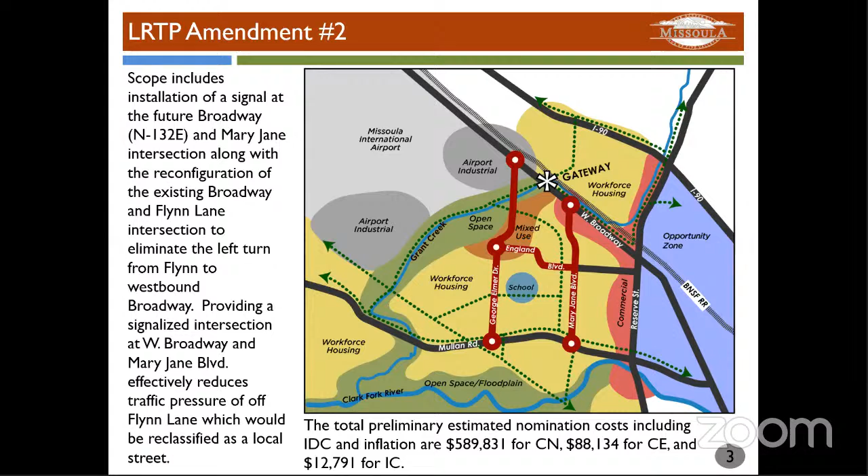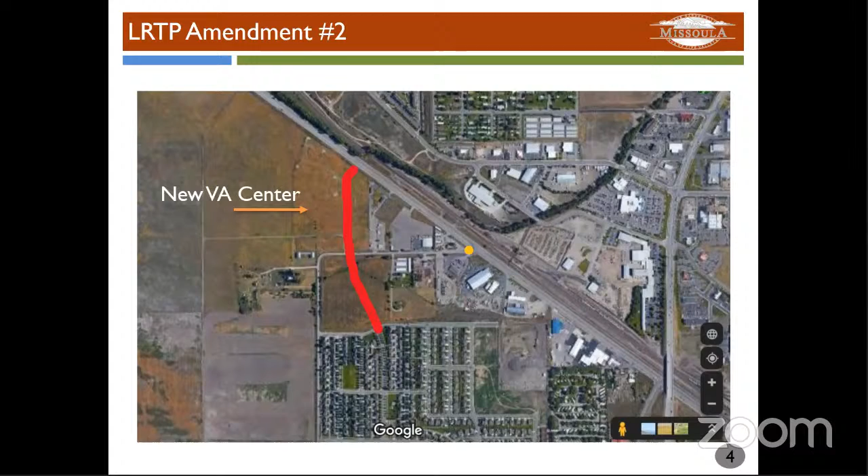So you can see the bottom of the committed projects there. Project 15 would be moved up to committed from recommended or illustrative projects. So staff recommendation is to approve Amendment 2 to the 2020 LRTP as approved, and I'll open it up for discussion.

John, I just have one clarification on the memo. The dollar amounts on this, the total estimated project costs are $10,000 for PE, $677,965 for CN, including CE, and $12,791 for IC. I just want to clarify that—I believe your slide had different numbers. Yeah, you are right. So the numbers I received from the project team are slightly different from what MDT provided. They're relatively close, but that is something we will need to clarify. Okay, thank you. Yep.

Okay, comments, questions from the committee? This is an action item, so I believe we do need a motion to recommend or not recommend approval of this amendment. Ben Weiss.

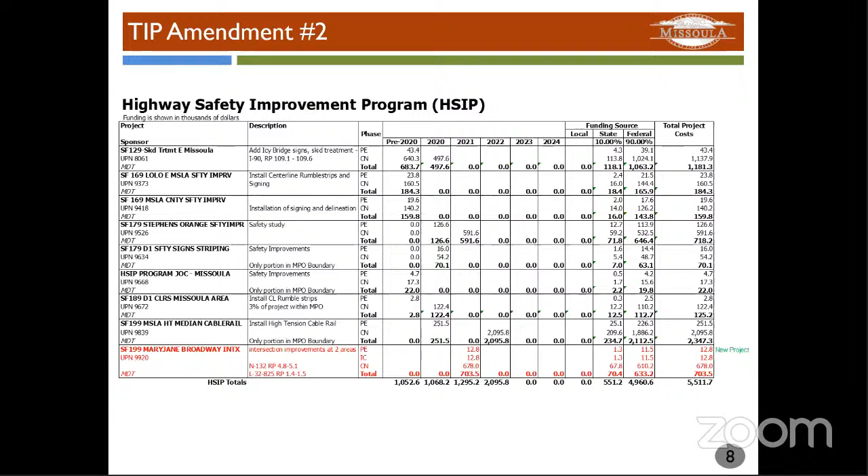The amendment here includes it in the HSIP table, which is part of the transportation improvement program, and this document was included in your memo packet. Here's a screenshot of the project highlighted in red with those costs. You can see the other safety projects included here right now, but we are asking for approval of amendment number 2 to the TIP to include the Broadway and Mary Jane project into the HSIP table.

Okay, so we are looking for a motion to approve amendment number 2. Hi, this is Vicky. I motion to approve amendment number 2. Thanks, Vicky. This is Ellen, I'll second. Thank you, Ellen.

Any comment or discussion on the motion? Any public comment? Seeing none, we'll do a voice vote. All those in favor of the motion to approve amendment number 2, say aye. Aye. Aye. Aye. Aye. Any opposed? Hearing none, the motion passes. Thank you, John. Thank you.

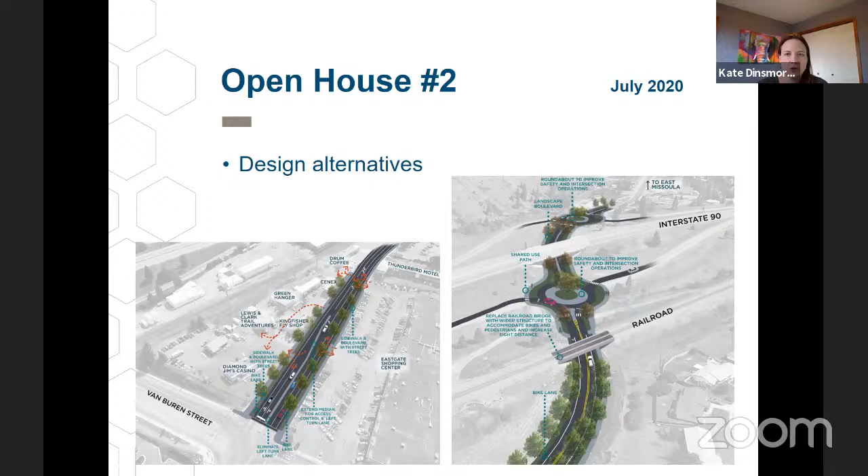I'm going to go through the results of those public comments and then how that led to the preferred alternative. We had over 1,200 Social Pinpoint visits—Social Pinpoint is just the platform we used for gathering comments online. There were 275 unique users, and we had 196 survey responses and comments.

The first question we asked was for a preference of the alternatives. There were 3 different alternatives: complete streets, shared use path, and sidewalks and parking. There was a pretty strong preference for the shared use path option, which I'll give you a quick glimpse of to remind you what that was. Basically, that included a shared use path from Van Buren to Easy Street and a shared use path along the base of Mount Jumbo connecting downtown to East Missoula.

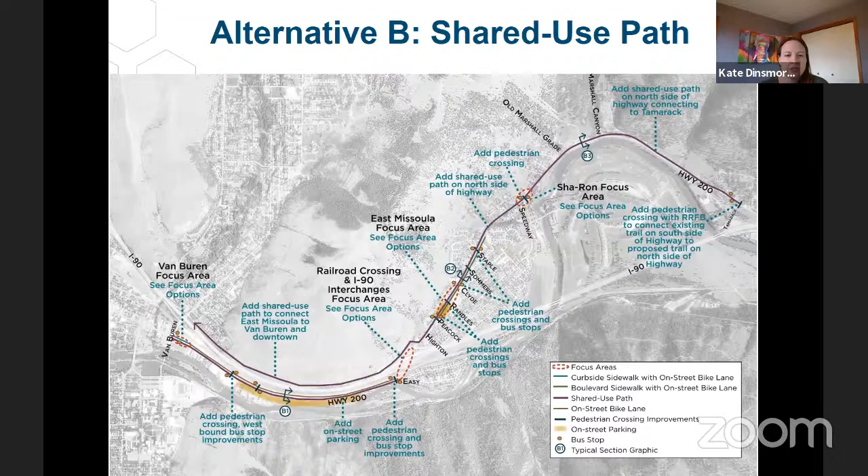The comments we got were that people liked the safety aspect of it, with the path having that separation from vehicles. They liked having a continuous path the entire length of the corridor, including a trail along the base of Mount Jumbo, which people generally liked. They also liked having boulevards with landscaping. There was concern about not having a connection along 200—how this path stops between Easy Street and Highton—really wanting to still have that connectivity. There were also some concerns about maintenance.

The first focus area was along Van Buren, on that west end, trying to get a preference for what people wanted as far as bicycle and pedestrian amenities. There was a strong preference for a shared use path for bikes and also for pedestrians, but some people desired a boulevard sidewalk there.

The next focus area was at the I-90 interchanges and the railroad underpass. There were 3 options here. The first was 2 roundabouts, one at each of the eastbound and westbound I-90 interchanges, plus an improved railroad underpass—completely replacing that with a wider structure. The second option, which I'm showing, is the Mount Jumbo shared use path connection, which didn't include the connection from Easy Street to Highton Street, or changes to the railroad underpass there.

And then the third option was one roundabout, and it would have just been that eastbound I-90 interchange, not the westbound, and also did not include any bike ped improvements.

And so people generally really wanted to widen the underpass for the railroad. I think this one was a little bit of a nuanced survey, because not all the options included the railroad underpass. If we would have added that to the other two options, we would have seen a different response. But I think what we gathered from this is that people really liked the railroad underpass, generally thought there was a need for a roundabout, particularly on the eastbound side, and then liked the Mount Jumbo option because it didn't move bikes through the roundabouts.

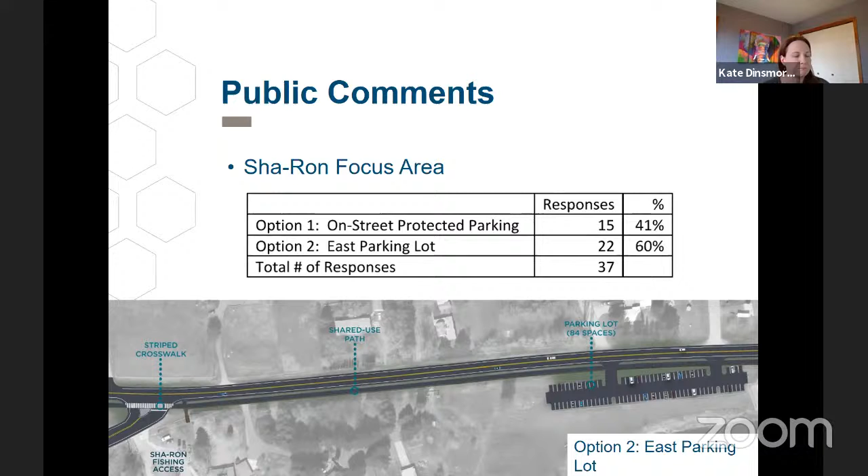All right, so after we got all the public comments, we met with our advisory committee to determine the preferred alternative. We had two meetings where we figured this out, and it began by evaluating and ranking the alternatives based on their ability to achieve the project goals. Those are improving safety, improving operation and addressing access management, expanding multimodal options, enhancing the unique character of each segment, being cost-effective, feasible, and maintainable, and protecting the environment from negative impacts. And then we also took into consideration public support.

So this is the preferred alternative that was developed. It was decided that a mix of the alternatives was needed to respond to the unique character of each segment of the corridor, and no one alternative was the right solution.

The committee agreed right away that bike ped facilities should be included for the entire length of the corridor, with a mix of shared use paths, on-street bike lanes, raised cycle tracks, and sidewalks. One of the first and easiest decisions was to include a shared use path from Staple Street to Tamarack. There's a lot of discussion on the other segments, so I'm going to go into more details of those areas.

Looking at this overall preferred alternative, it includes a shared use path and on-street bike lanes from Van Buren to East Missoula, with a new wider railroad bridge and eastbound I-90 interchange roundabout. Through East Missoula, cycle tracks, sidewalks, and landscape boulevards are proposed. A new parking area is proposed just east of Sha-Ron, along with a shared use path connecting East Missoula to Tamarack.

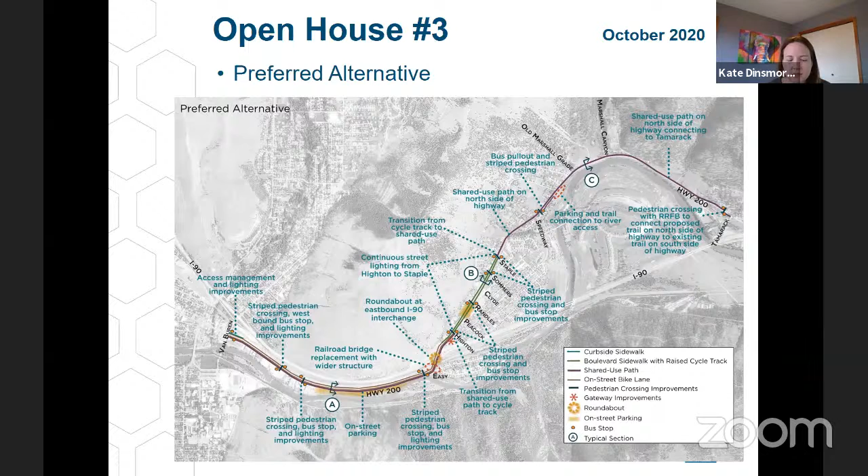For the East Broadway segment, there's a shared use path on the south side and an on-street bike lane provided from Van Buren to I-90. The shared use path provides a two-way connection for users that only want to access locations on the south side of Highway 200. The advisory committee felt it was necessary to accommodate how people use the corridor, often beginning and ending their trip on the south side of the highway. This includes students living in apartments along the river and going to classes at the university.

The on-street bike lanes cater to commuter bicyclists from East Missoula traveling into downtown for work. On-street parking is provided where existing right-of-way width allows, providing overflow parking for apartment complexes and events. That area is shown with the yellow highlight, and I think I can kind of point to it in this area here. As this project progresses past that planning level design, that'll need to be evaluated to determine where it actually goes, but we want to make sure there's an option for on-street parking to help out with the multifamily housing in that area where there's typically overflow parking.

The committee chose to prioritize the eastbound on-street biking lane over on-street parking, so we're really only having that on-street parking where there is space within the existing right-of-way.

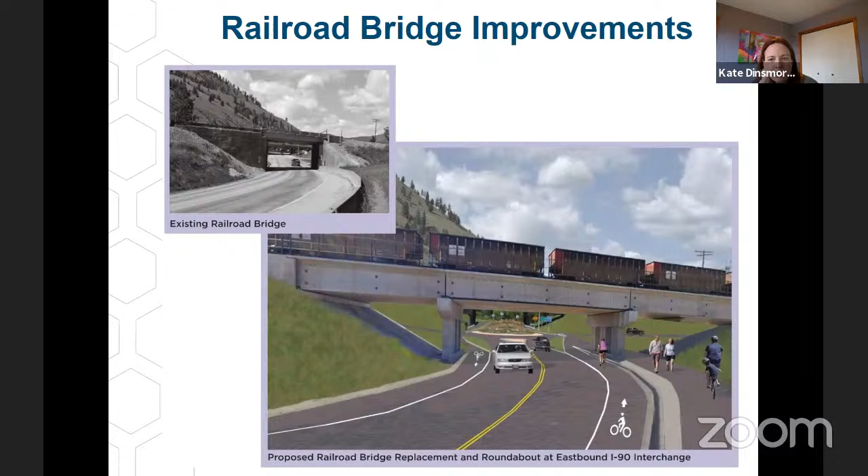Cycle tracks were chosen because a separated bike facility was preferred for protection. We also discussed a shared use path, but it was desirable to have equivalent improvements on both sides of the road, especially when considering future redevelopment along Highway 200.

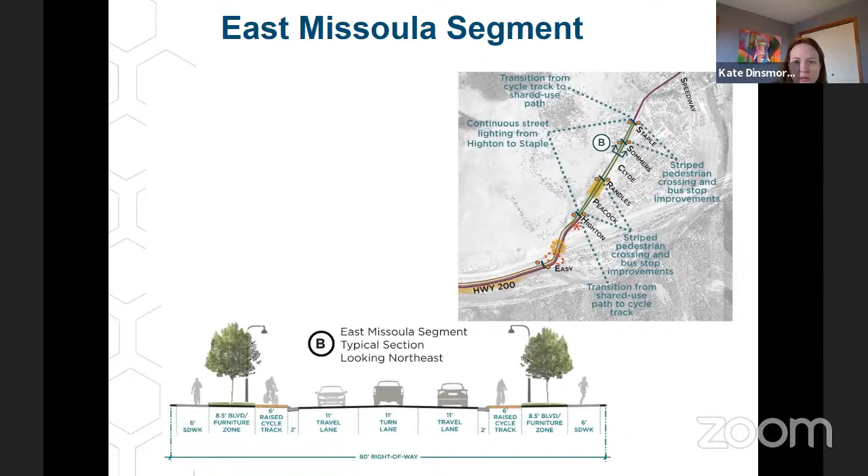There was also considerable discussion on the transitions from cycle tracks to shared use paths. We looked at how that would happen in more detail and were advised to incorporate transit stops into those transitions and crossings. So looking at Highton Street, we're proposing a transition from a shared use path to a cycle track. The two-way shared use path transitions to a one-way raised cycle track on the north and south sides of Highway 200 through East Missoula. This includes a bicycle and pedestrian crossing at Highton with a refuge island to allow pedestrians to stop before finishing crossing the street. Bus stops are located at this intersection so users have access to the street crossing.

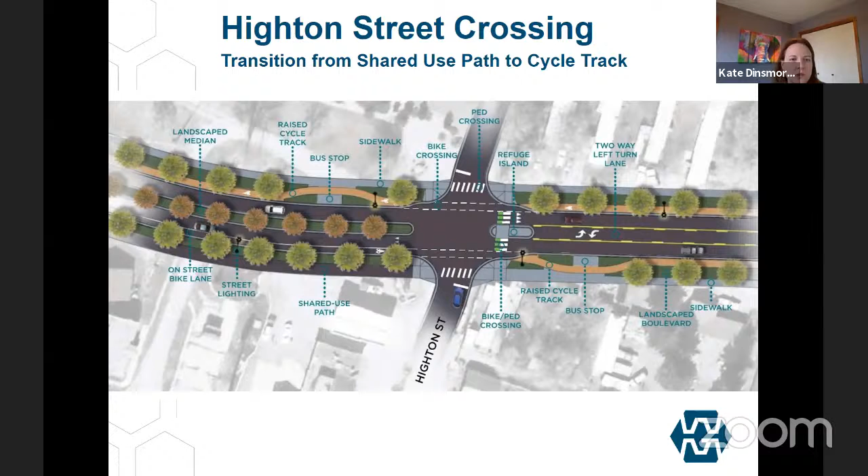Here's a rendering of the improvements through East Missoula, creating a new look for East Missoula and improving safety for vehicles, pedestrians, and bicyclists.

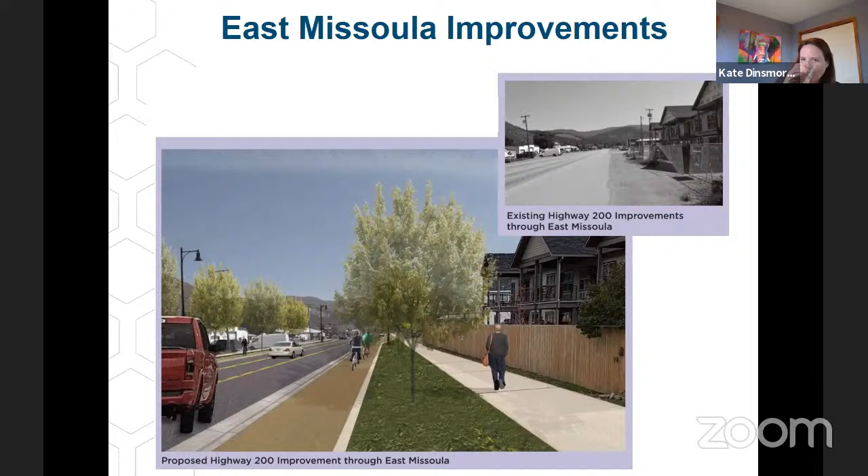This area lacks curb, gutter, and sidewalk, as well as having numerous approaches and large areas of continuously paved property abutting the road, resulting in nearly continual access with few restrictions in place. This causes safety and stormwater issues. To address these issues, curb and gutter will be installed along the entire length of Highway 200 through East Missoula. This will address stormwater and drainage issues and delineate access to businesses and residences, as well as street connections. Intersecting streets will be better aligned for more perpendicular street intersections.

A two-way left turn lane is shown through most of East Missoula, which removes stopped or slow left-turning vehicles from the through lanes and stores those vehicles in the median area until an acceptable gap in opposing traffic is available. Additional driveway access is also provided to existing businesses and residences.

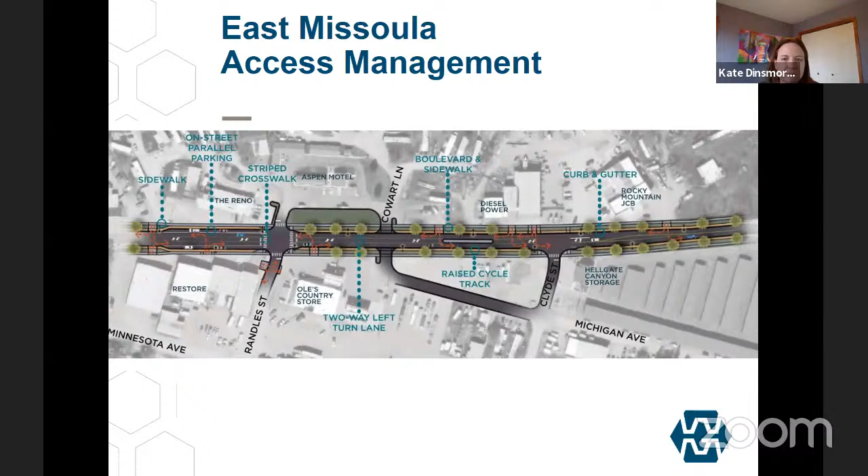At Staple Street, we transition back from the cycle tracks to the shared use path on the north side of the highway. This includes a bicycle and pedestrian crossing, again with the refuge island, and we also place the bus stops in coordination with this crossing.

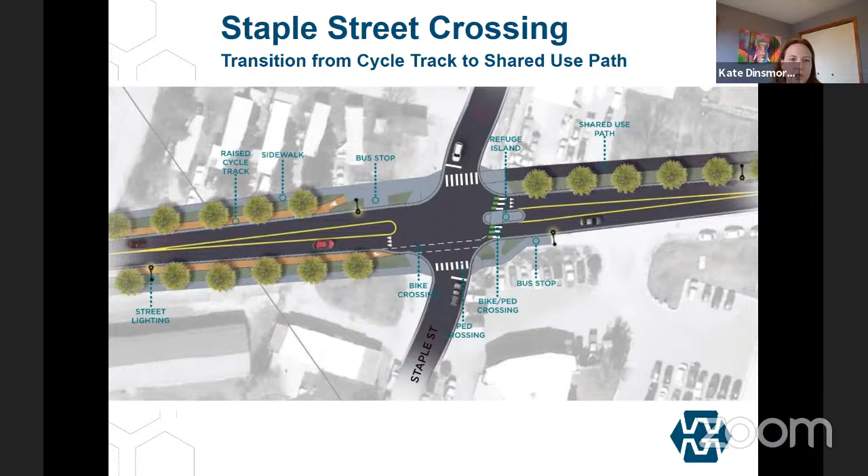Moving to the east, there's a shared use path on the north side of the highway through the Sha-Ron Marshall segment, connecting to the existing path at Tamarack. The path is located on the north side of the highway to provide better access to existing residences and to address construction feasibility issues where there is limited space between the river and hillside.

A rectangular rapid flashing beacon is provided near Tamarack for users to cross Highway 200 to the existing trail east of Tamarack. A new parking lot is also provided east of the Sha-Ron fishing access, with the trail connecting back to the river access.

So the shared use path is on the north side. We are proposing a smaller trail to connect on the south side, connecting the parking to Sha-Ron. There's another property owner between the proposed parking area and the river. Ideally you would access directly from that parking area, but that's still being worked out.

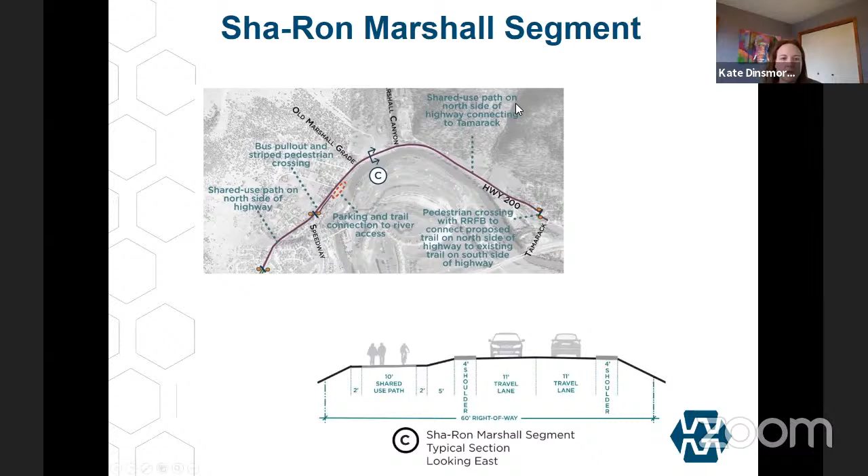There's also a bus stop, which includes a bus pullout for shuttle service. Here's the bus pullout, which could serve both Mountain Line as well as a shuttle service for the tubers. The idea is to provide an air compressor at the bus pullout so people can ride out there with their deflated tubes and then inflate them once they get there.

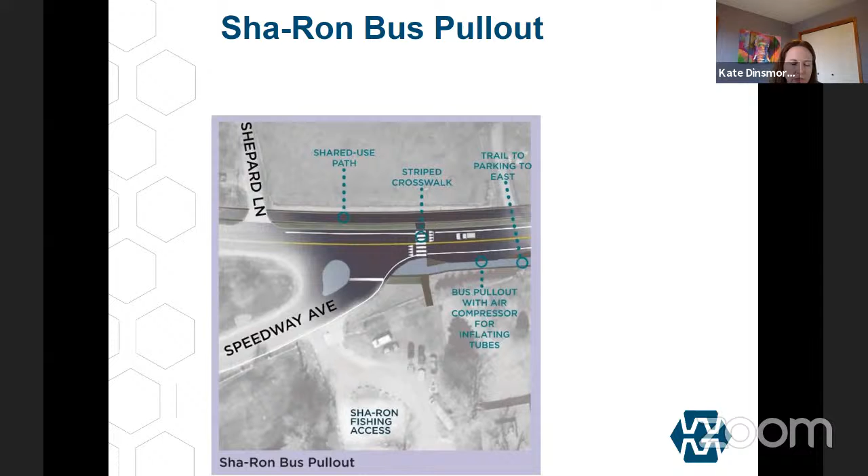There's also a trail along the south side connecting the parking to the east, and a crosswalk connecting to the trail on the north side of the highway. Here's a little more detail on the Tamarack crossing, including a striped crossing with the rectangular rapid flashing beacon to alert drivers, since this is a faster area, and also coordinating that with the bus stop locations.

There were just a couple of other items discussed with the advisory committee, including maintenance, particularly through the East Missoula segment, and the need to work with MDT to get approval for these improvements. So we're going to include some strategies for addressing maintenance in the final plan document, and as these improvements are implemented, maintenance will need to be addressed as well.

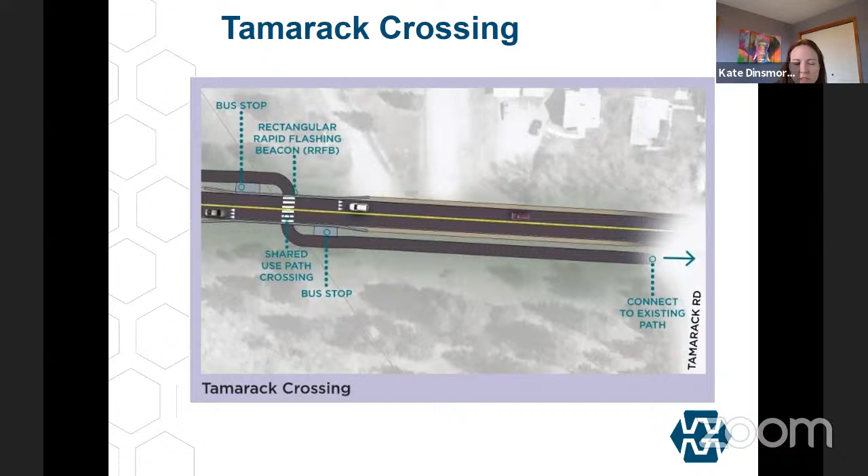So next steps: we're waiting another week to finish getting public comments, and then we'll consider those comments and see if we need to make any changes to the preferred alternative. We'll also be evaluating funding strategies and project phasing and implementation, which will go into the final plan document, released for public comment. I think right now we're planning that for early January. Then we'll have another comment period, put together the final report, and go through the plan approval process.

That finishes up my presentation on the preferred alternative. I'm happy to take questions and comments. Okay, thanks Kate, great presentation. Comments and questions from the committee?

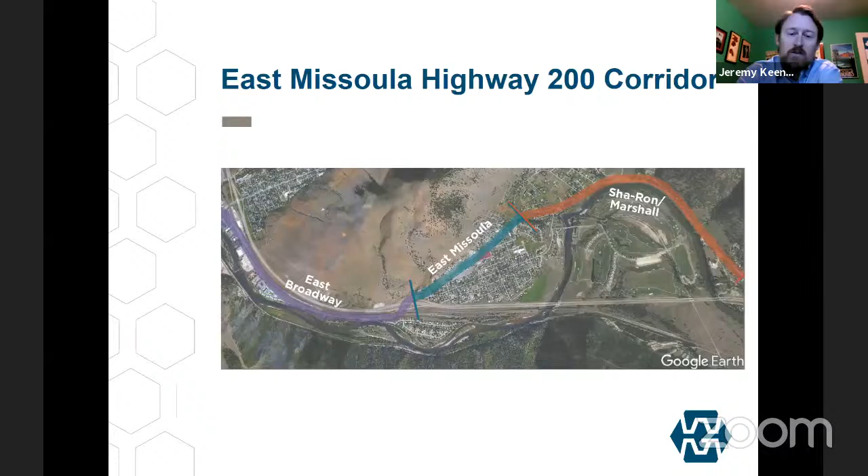I'm not seeing any hands. I have a couple. On the East Broadway segment, it looks like you're recommending bike lanes and a shared use path. Can you talk a little more about that?

Yeah. So there was quite a bit of discussion on this, and originally we had the shared use path on the south side and just a westbound bike lane, and then we decided to add in the eastbound bike lane as well. It really came from trying to serve two different user groups. We feel like there's people whose destinations are both on the south side of Highway 200, and so having a way for them to avoid crossing and then crossing back, we wanted that two-way shared use path for them.

We see that use a lot currently in people using the sidewalk. And then also thinking about accommodating that commuter bicyclist coming from East Missoula or heading out past East Missoula, we wanted to have an amenity for them as well.

Great, thanks. And if I heard you right, would that shared use path in some cases maybe pull off to be a riverfront path instead of adjacent to the road?

So right now it's planned, with this project we really tried to plan all the improvements within the right of way, so right now it's all in the right of way. But I think we need to consider—we know there's the idea of having that riverfront path. As this plan progresses, trying to see which project moves forward first, I think we should take that into consideration, and whether we need both a riverfront path and a shared use path right on East Broadway, and weigh that. So for now we're planning for the shared use path, but we'll wait and see how things progress.

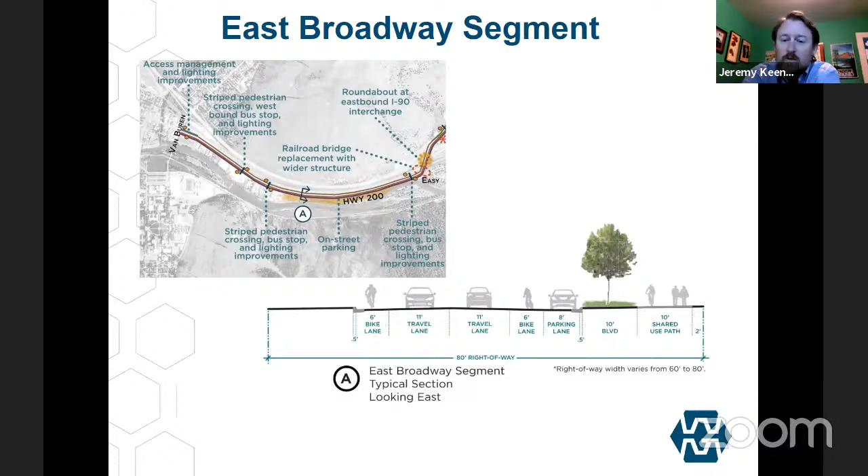Okay, I have just one more question. I'm not seeing any other hands. So it looked like early on that Mount Jumbo path idea was a popular choice, but it didn't make it into the preferred alternative. Maybe you could talk a little bit more about that.

Yeah, so I think where we decided to go with the railroad underpass is we felt like that was really the best solution. And while this might work, it just wasn't really meeting our goals of providing that connectivity in the way that we wanted. So that was really where I think we started leaning towards the railroad underpass.

And beyond that, the Mount Jumbo path, there's definitely some feasibility concerns with it as well. So I think basically, if both the railroad underpass and the Mount Jumbo path have feasibility issues, but if you kind of look at those as equals, then the railroad underpass is actually the better solution. So that was kind of how that decision was made.

Yeah, it's an interesting idea I hadn't thought about, but I see that a path on the north side of the interstate there doesn't serve a lot of the people that live either off of Easy Street or along Highway 200 as you get further to the west. So having the path on Highway 200 would be accessible to more people.

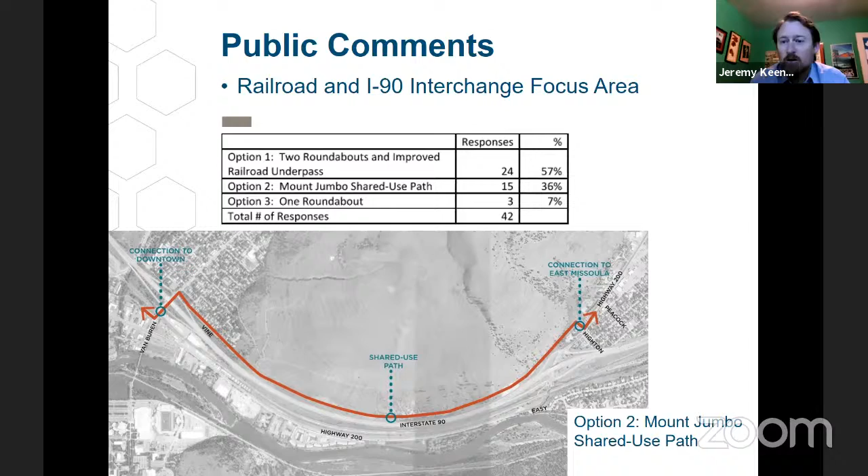And our last agenda item is a presentation on the 2020 Pavement Condition Assessment Survey and Report, David Gray and Aaron Wilson.

Yeah, all right, so let me share my screen here. We're going to kind of tag team this presentation a little bit, and just by way of a quick introduction, we're trying to wrap this project up that started seems like forever ago. It just for a variety of reasons, one of which being COVID and the challenges that it presents on all of our projects, but there were some timing and weather issues as well that compounded that. But I think now we're at a point where we're ready to be pretty much wrapped up with this, and we got some good data and results out of it.

So just kind of walking us back, the MPO funded this study to help get us a good baseline of pavement condition MPO wide, and we partnered with the city and the county, and the county was able to add a little bit to that contract and get all of the county roads as well. So now we have a really good baseline inventory of pavement condition throughout the whole county. This is going to be really helpful for us moving forward in terms of planning, reporting on our pavement performance measures, and Dave will talk about some of that, and then thinking about our maintenance budgets and what that means for our pavement condition moving forward. So getting the data was really the first step in what's likely to be a years-long or continuing process.

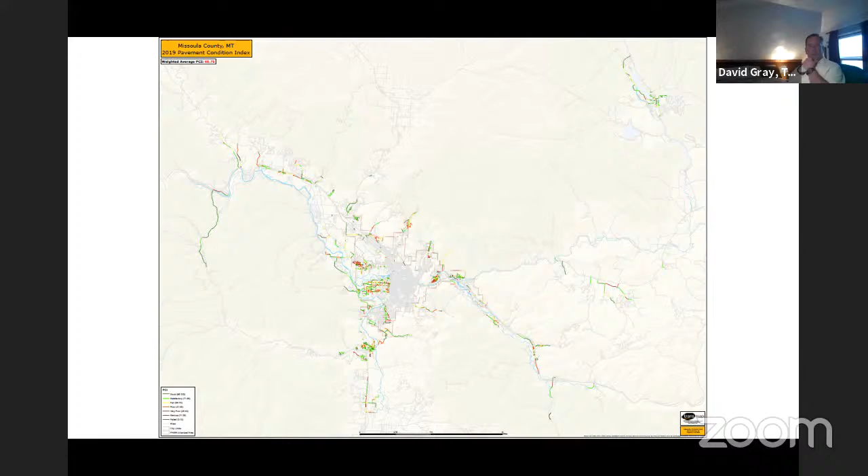Yeah, I think the online map will show a better illustration of what data we have and the scale. All right, so I'll go into the online map for the data we've received from them. I'm going to start in tight and then zoom back out because my kids are online learning and my bandwidth is pretty wonky right now.

So what we're looking at right here is the pavement condition index, which was come up with by looking at a number of conditions for the pavement, like alligator cracking, heaving, slope of the road, rutting, that kind of thing. All of those come into play when calculating the pavement condition index.

So I've chosen a section on South 5th Street West between Grant and Johnson, and the PCI is 6. So that takes us down to failed, right?

The types of data that were gathered included imagery like street view, and I'll show you that in a second, LiDAR, and then accelerometer, which is, you know, how rough the road is.

So when we go into one of these segments, we also have all these little dots, which are the street view imaging that the truck captured as it drove down the street. For this particular segment, this is what that failed pavement looks like.

Does that make sense to everybody? If there are any questions, please let me know.

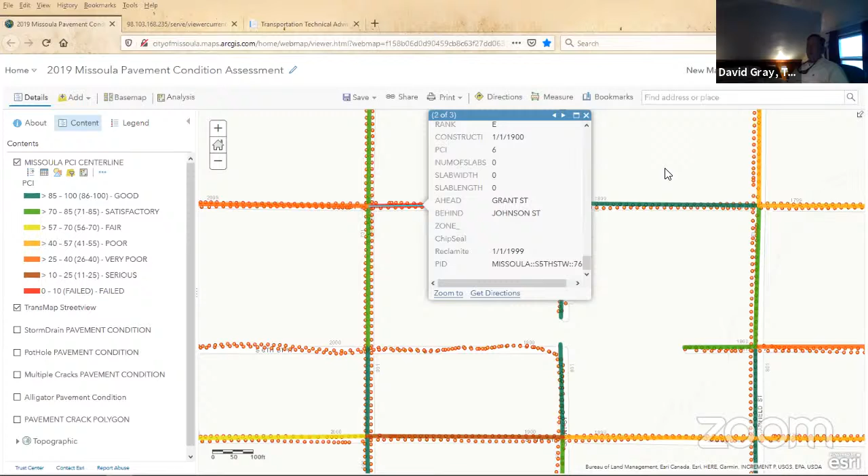And this will be out online soon when we're working with Lee and GIS to end with Public Works and Streets to make sure that they have this data.

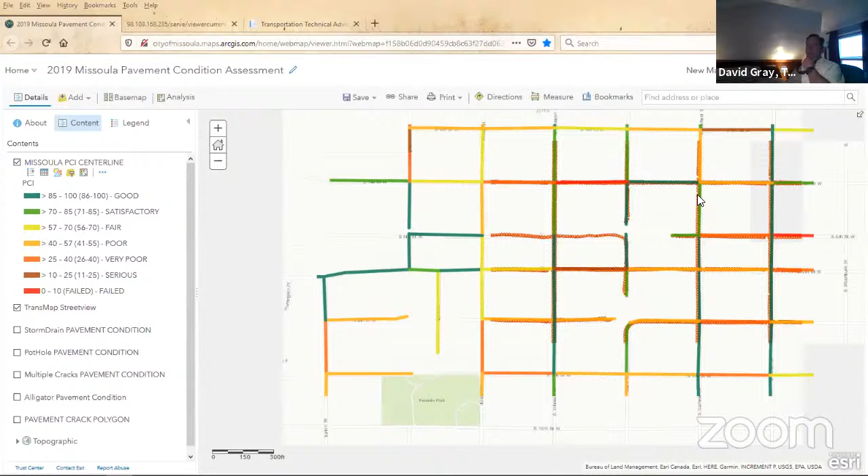But the imagery, probably the street view part, probably will not be made public, because unlike Google, we can't fuzz out personally identifiable information like license plates and people's faces and what they're doing in their yard, and that kind of thing.

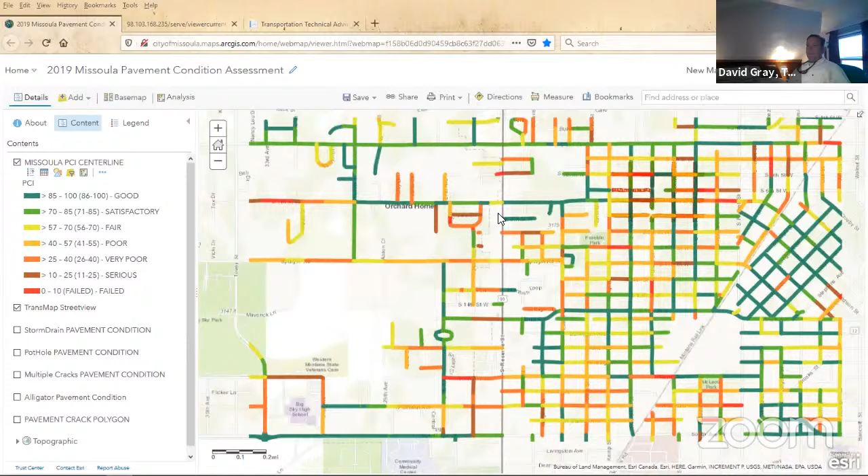So the coverage extends well past the MPO urbanized area out to Seeley, Potomac, out here. So the county captured a lot of stuff that was outside of the urbanized area, and it has all the same data as what we captured interior. So we can use that for a variety of different purposes.

So the LiDAR can identify signs, it can look at street paint conditions, storm drains, manholes, all of that, curb, gutter, sidewalk, even with on-street parking. Because of the frequency of the imagery, it can see pretty much around the car.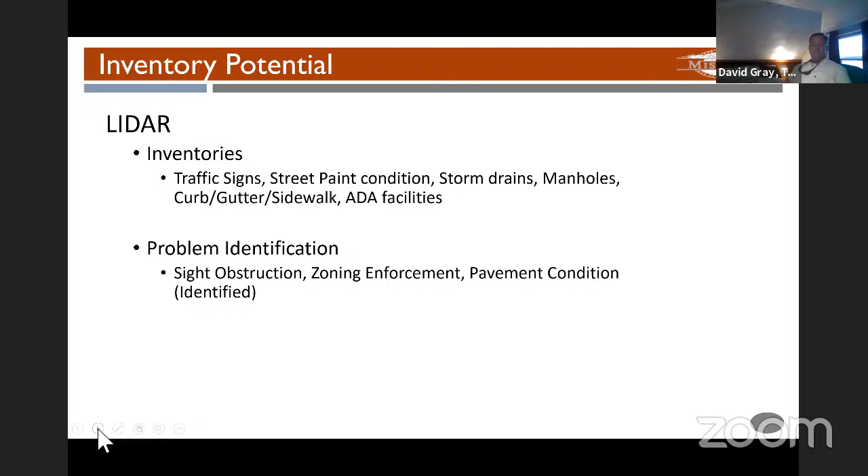Great, thanks. And so the other piece of this, in addition to the data and how it can be used by the MPO for our performance measures and reporting, it also gives us the baseline and the tools we need to really start looking at a pavement asset management plan or pavement management system.

And using that PCI and the pavement condition that was collected and modeling through software like MicroPaver, we can have a more data-driven approach to our pavement maintenance program, and get additional data in terms of how effective we're going to be, where our highest payoff investments in maintenance are, so that we are essentially preventing streets from going into these lower PCI ranges where we might have to switch from basic maintenance to more of a reconstruction or more expensive maintenance treatments.

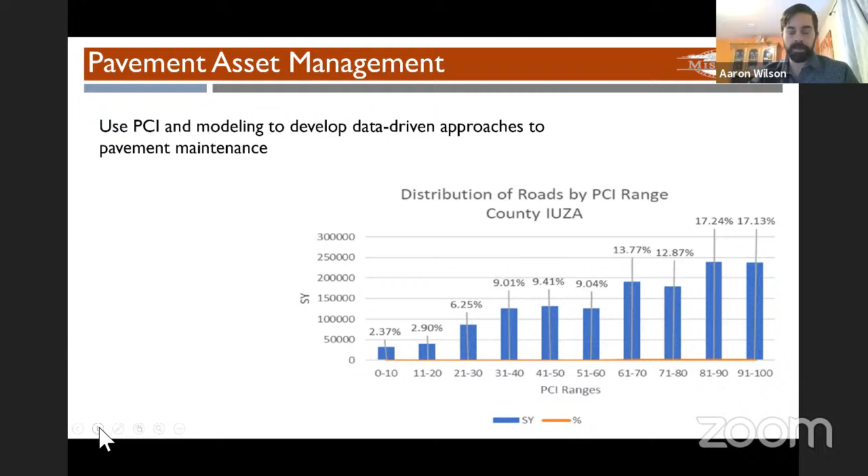And so this data collection gives us that baseline, and we paid for some initial reports that went along with this that outline how that works and what those initial recommendations are, and gave us some scenarios in terms of budgeting and forecasts of where we might be in 5 years, given a couple of different funding options. So again, for planning purposes, this will be really, really useful. The asset management tools primarily rely on a software called MicroPaver, or that's what we were using.

It's a model. It takes a variety of different inputs, like the road classification—so is it a local street, a collector, arterial? It has different deterioration models or performance models, looking at what happens to that pavement over time if we don't do anything to it. It looks at the current PCI and places each road segment along that curve of where it's headed in terms of condition.

And then we input things like maintenance costs—how much does it cost to do chip seal or mill and overlay or reconstruction? So then that software can, looking out 5 years, see how fast different streets are degrading, and when they pass over that threshold from something like a chip seal into a more substantial maintenance. And then we can look at budgets and project out what that means for our deferred maintenance or our future PCI under a couple of different scenarios.

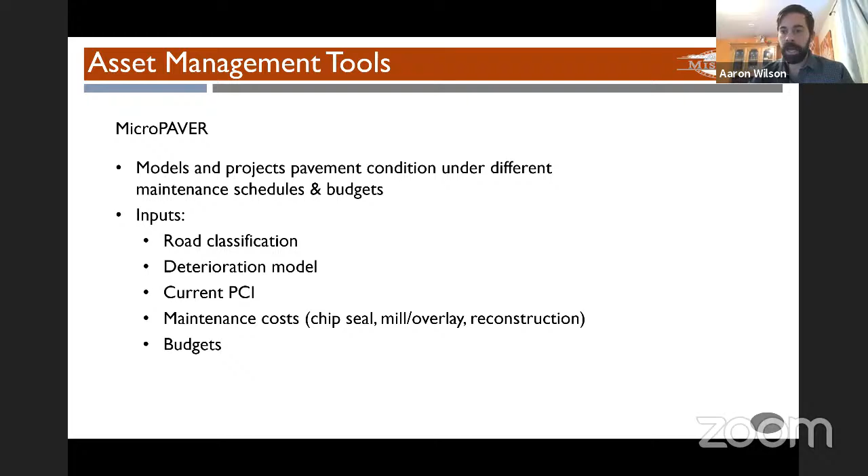So again, we can estimate the total cost for maintenance. I think one of the useful numbers is what it would take to bring all of our streets up to essentially a good repair PCI. That's our maintenance need that we're looking at in all of these scenarios.

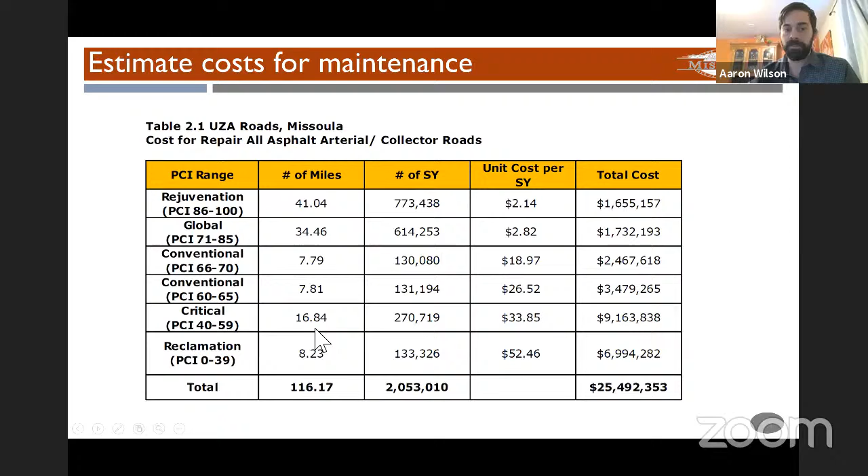And we can do that by different types of streets, like functional classification. We can see as you get further down in these PCIs, the cost to maintain that gets substantially higher. For example, keeping the high PCI streets maintained—there's a lot more of those, but the cost is much lower than the smaller number of miles of critical or reclamation, essentially the reconstructions.

And then we can look at a variety of different scenarios. What would it cost to maintain that PCI at its current rate? What would it cost to maintain a target PCI, say of 71, which is a reasonably good road, or at least in that condition where those cheaper maintenance options are still viable? And then what happens if we do nothing—over 5 years, if we don't spend any money on maintenance, what happens to our roadways, just to get a sense of the do-nothing approach.

So there's a lot of data in those reports. There's a couple of key takeaways that I think we're learning as we've gone through this. One, the biggest, is that our current budgets aren't keeping up with the need—we have more roadways and more maintenance needs than we're able to repair with our current maintenance budgets for both the city and the county. But that said, looking at these models, we think we need more data or more time to evaluate the accuracy of those performance models that they've created for us.

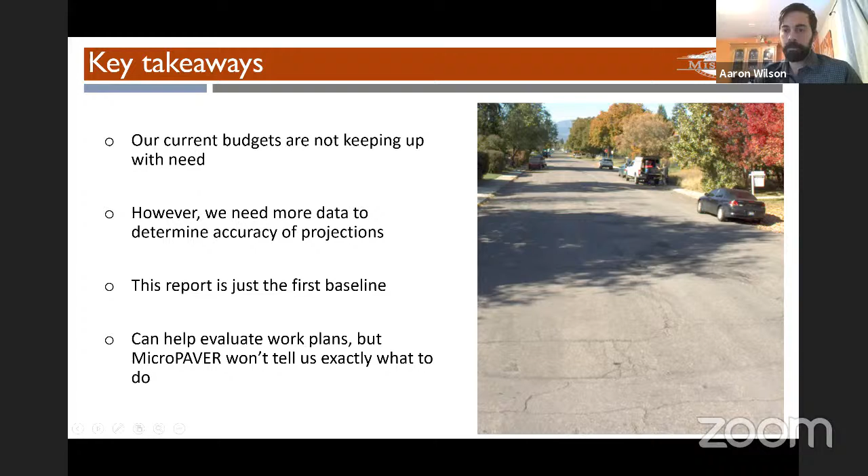Any questions on that from the committee?

Yeah, thanks Aaron, appreciate that. From a public works standpoint, this has produced a lot of really good data for us to use, and will be helpful going forward. Ben Weiss.

Thanks, that was a ton of good information. I was really interested in the slide that showed what our current funding level will do, and then the different funding levels to bring things up. But I noticed that was only arterials. Is that correct?

Yeah, that was just an illustration. We have the same data for local streets as well. One piece of this, we only did the data collection for the non-MDT routes. MDT has their own pavement assessment program. The idea, as Dave mentioned, is to get consistent. For the MDT routes, we have MDT's data to look at. They're developing their own maintenance program. This gives us a sense of where our local streets are, both the local and arterial collectors.

Interesting, I didn't know that we had locally owned arterials, I guess. I don't think there's much on the arterial. It's probably just the way those reports lump arterials and collectors together. Oh, all right.

So, I dug through the report and found the local slide, and the amount of money there is staggering. It's like 10 million annually needs to be spent to even just keep them from backsliding a ton. So I guess, without putting Brian and Jeremy too much on the spot, are we going to have to think about selectively allowing certain streets to degrade so that we can keep others at functional levels?